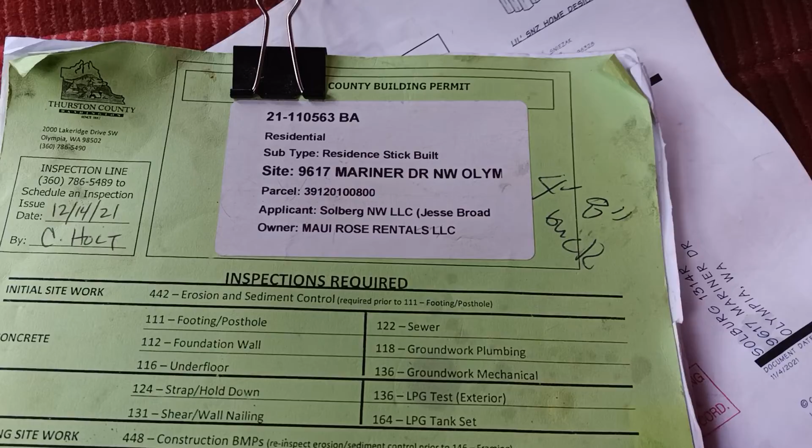This is a correction for a foundation wall inspection for 21-110563.

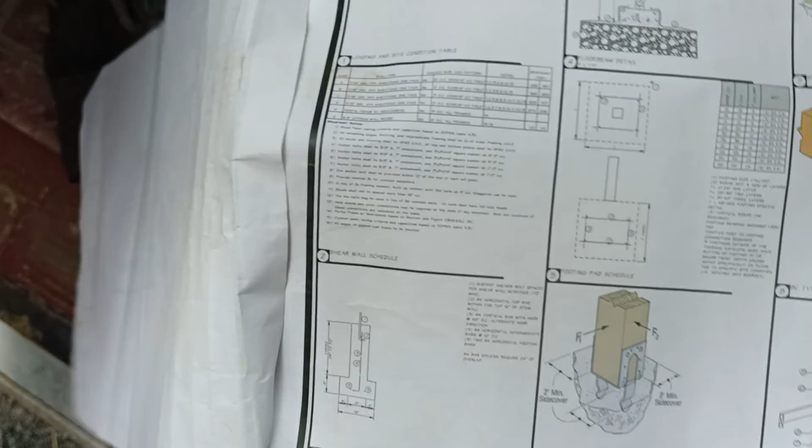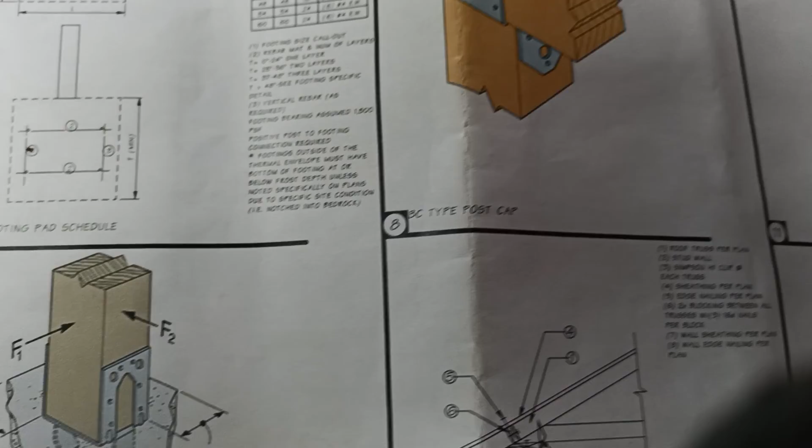Corrections noted on owner stamped approved copy of plan were: firstly, the number 4 call out for an intermediate bar in the 2-foot foundation wall. We weren't sure of the clarity being 12 inches on center, but we did add that second bar to ensure we were correct according to plan.

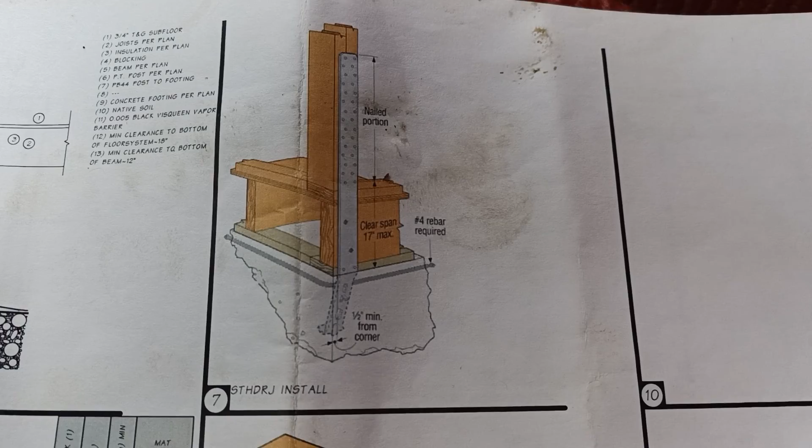Second issue being we want the number 4 rebar to carry in the top portion of the strap. If I'm interpreting what was asked of me correctly, we were able to elevate the steel with the intermediate bar to catch on the bottom portion of the strap as well as the top portion. We'll show that in the physical.

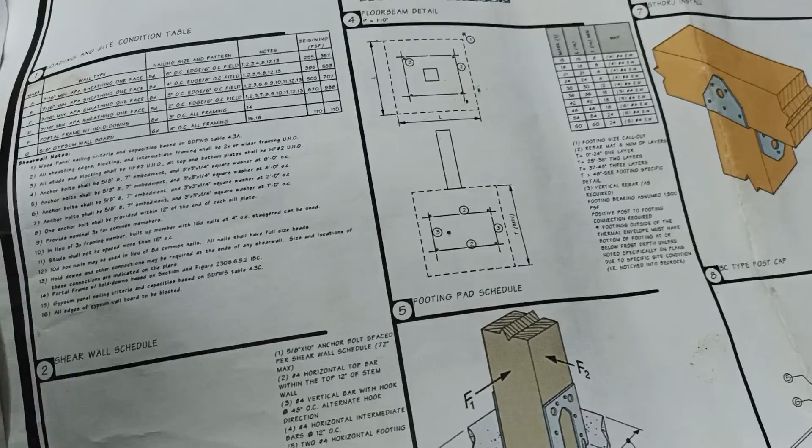Lastly, the pier pads with the 4 bars each way, you wanted to see elevations show proper depth and clearance, so we'll show that as well. We'll head out there now.

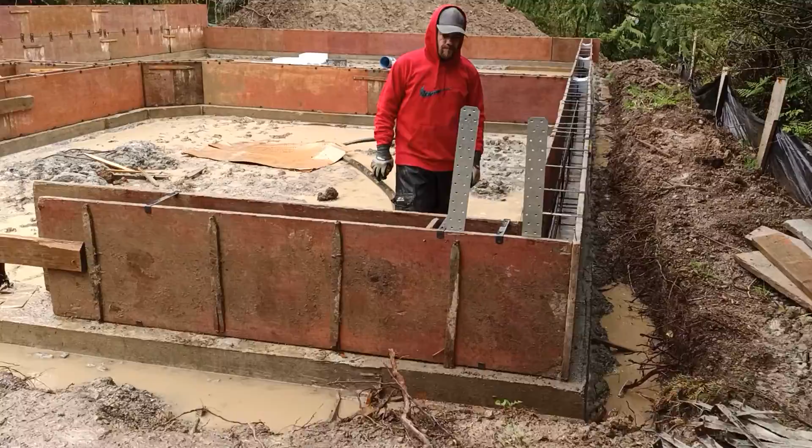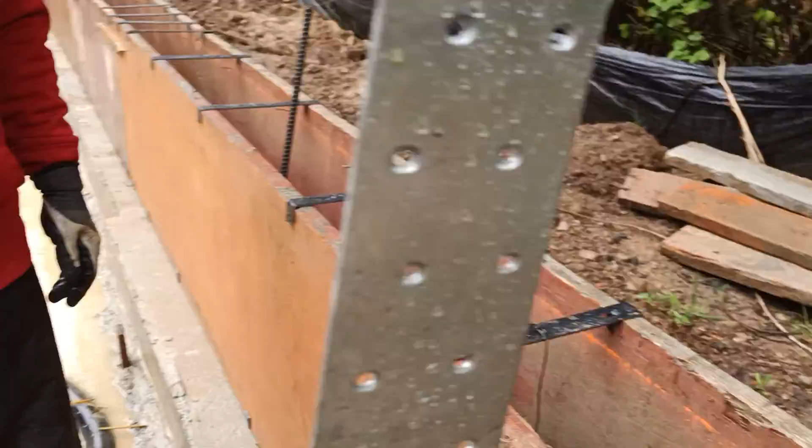And we're looking at front of garage. We'll start with the left side first and show that second bar, intermediate bar catching well within the strap, as well as the left side garage wing shear panel, which is connecting nicely. Hopefully that's what we're shooting for and looking for.

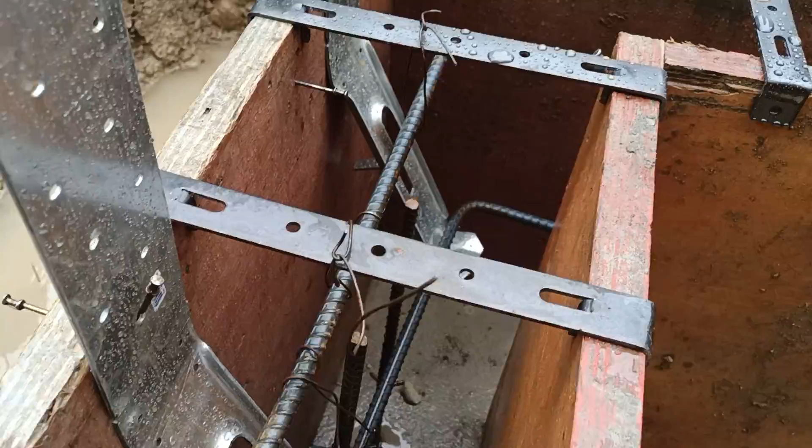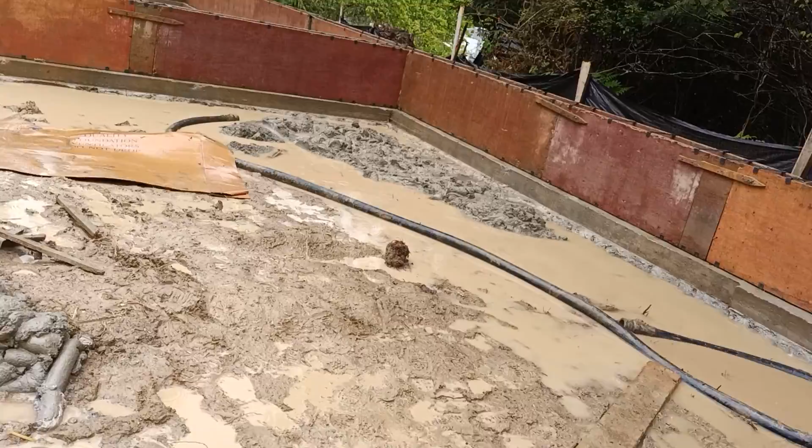Second bar added throughout garage. We will come around to the right side of the house, get the scope of wall.

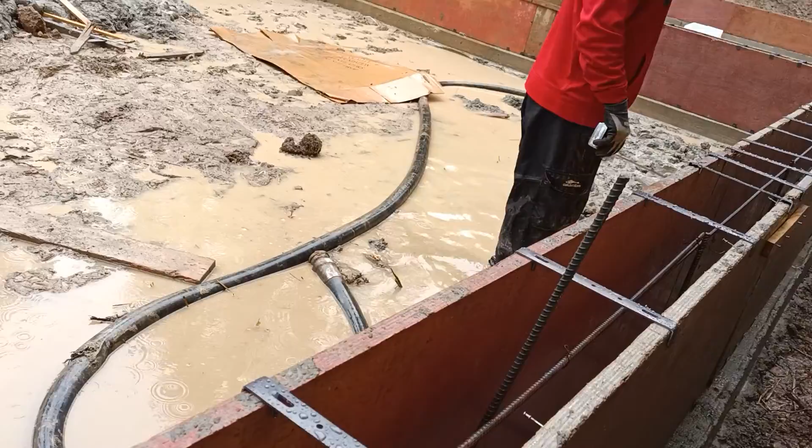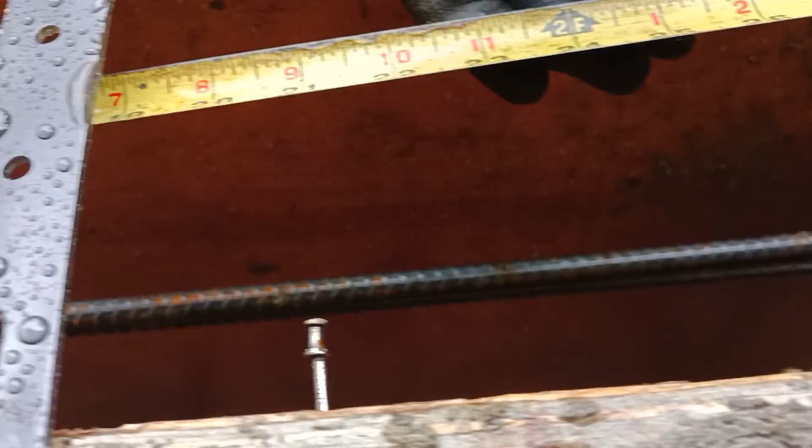We'll show our 2 bars in the wall. 2 foot. Yeah, we have a 2-foot lap spacing there for that top bar. We did just raise the original bar and add the second bar to midpoint.

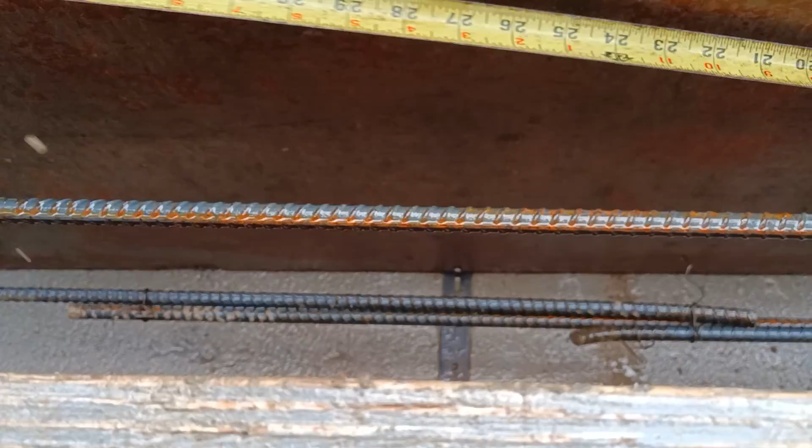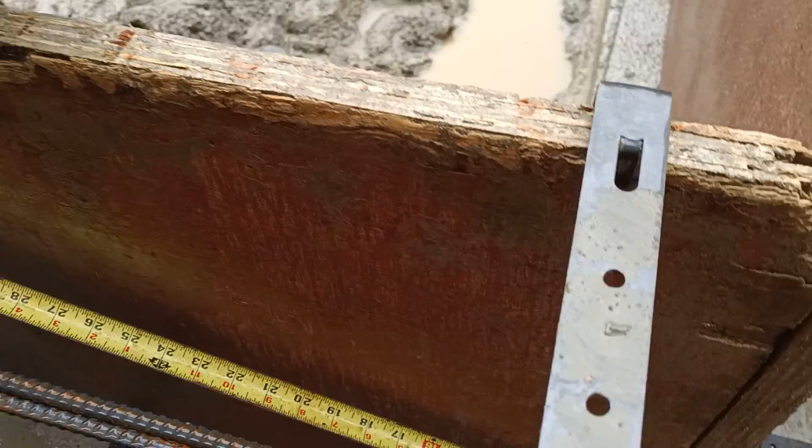Here's a couple more laps to show you on the bottom bar down in the intermediate. That one right there too. There's 2 foot right there. And then we got one right here as well for the intermediate bar. Just showing proper lap spacing.

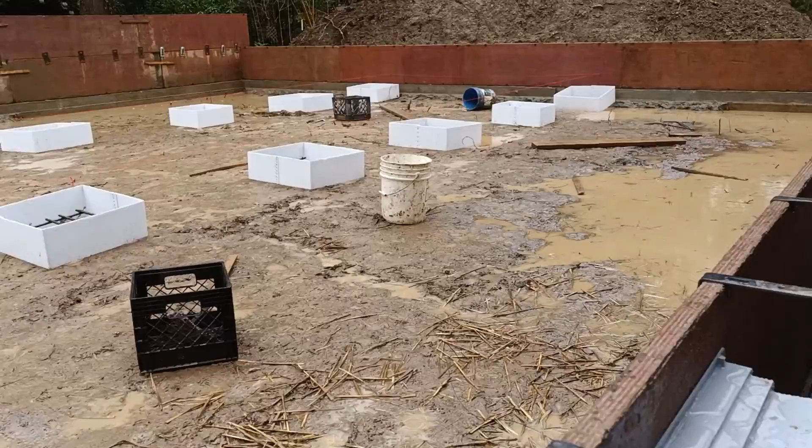We show the second bar in the back of the garage as well. I'll hop on the inside here. More of the same, 2-foot bar.

Let's show the 12-inch clearance on the top bar there. We're still well within the 12 and the 2-foot wall, no problem. 12 inches right there. And then obviously we have some external crawl spacing, so we've got proper clearance and distance away with multiple bars to the buck.

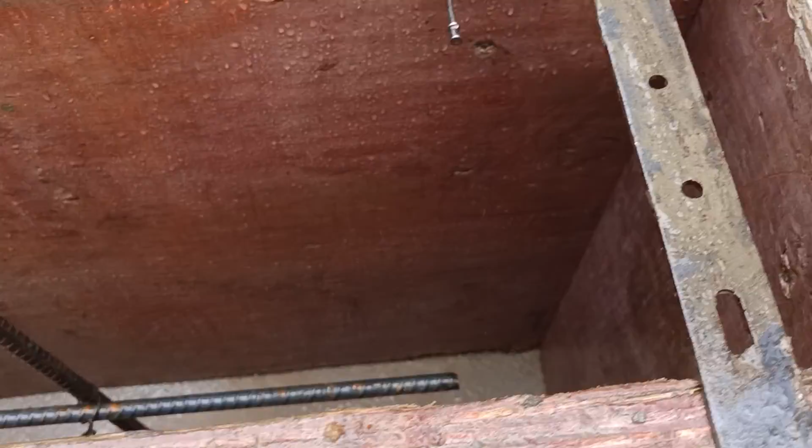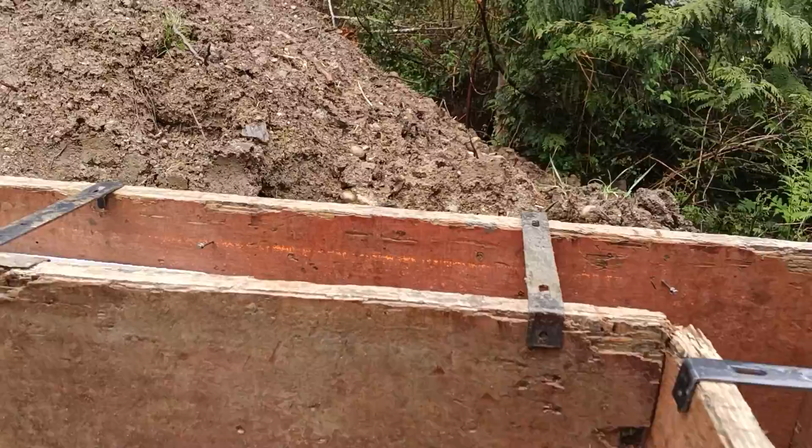And then coming around the corner, more of the same. You got a 2-foot lap there. Heading down that back wall.

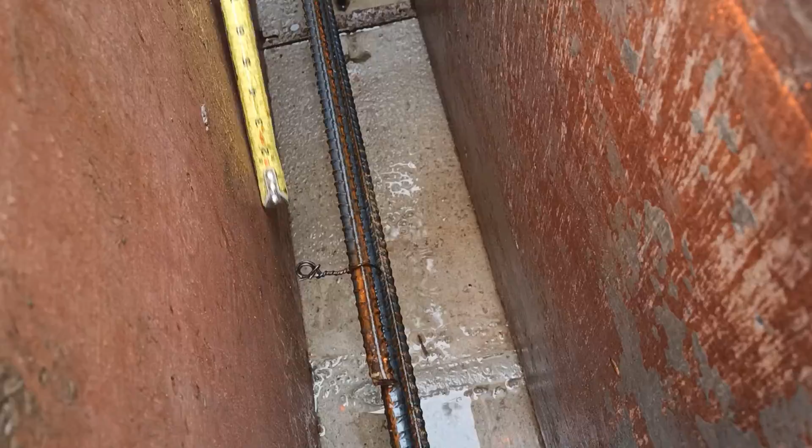We'll show the 2 bars of steel as well. Again, we'll show within 12 inches of grade. Got a lap there. We can show our always sticking to over 2 foot with the inch away on the tie. 2 bars with the proper spacing going into the 4 foot, which was already shown.

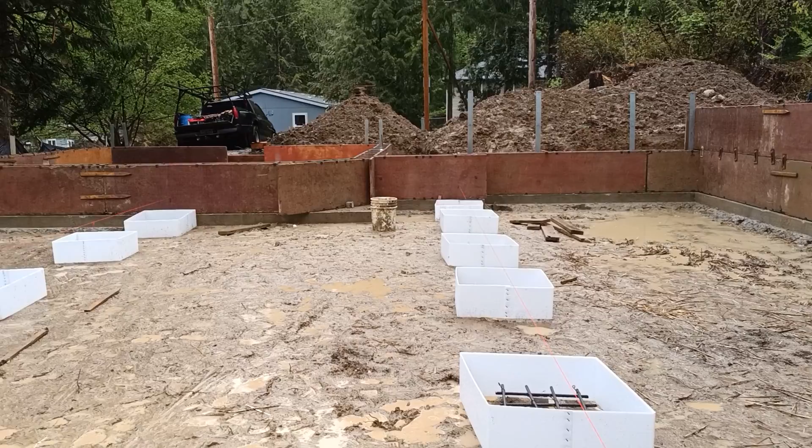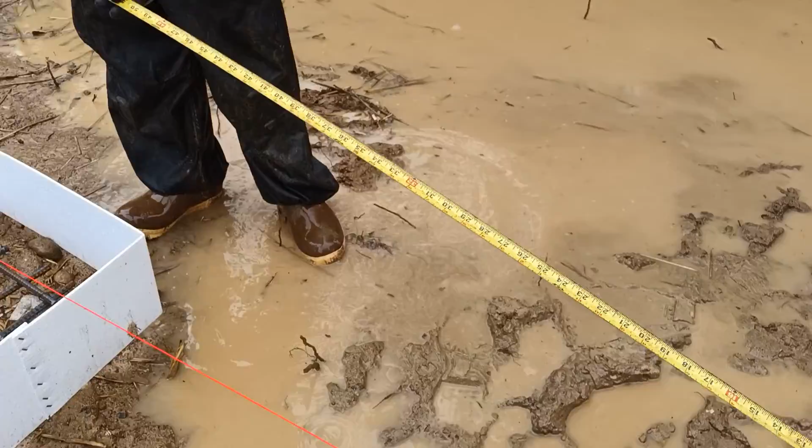Then the next most important and time consuming was elevating the pads with the dobie blocks. We set up strings, we can verify for you. It's 12'2" from outside to outside on both, 6 foot on the spacing. We could start by stepping back for scope, and then you are 6 foot for the spacing.

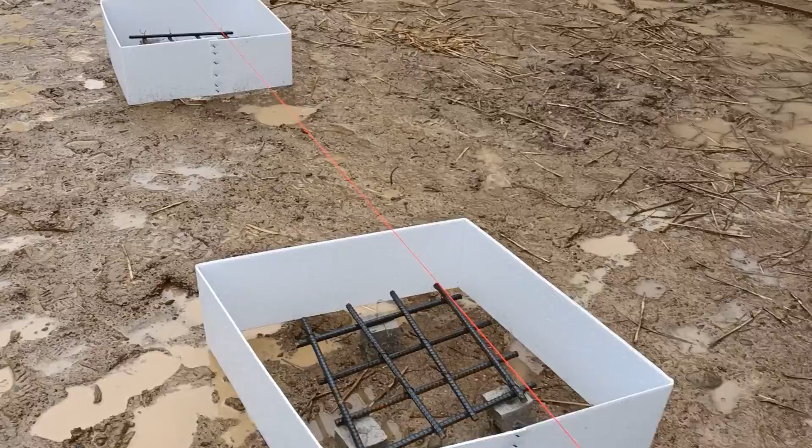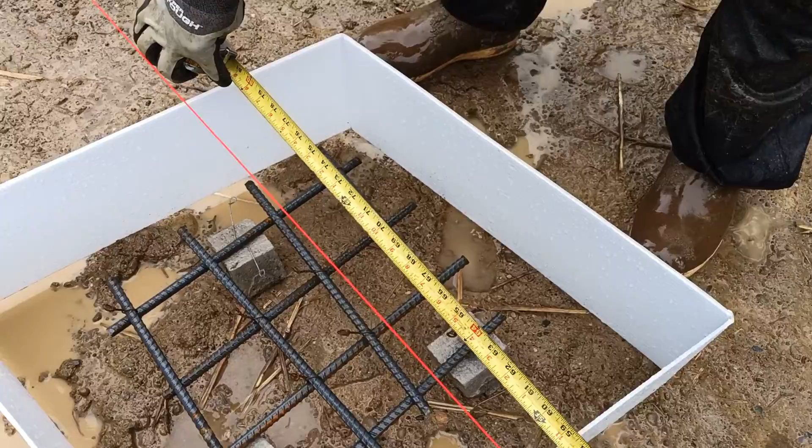We could carry through to the next one just to give you depth and an idea, which can be difficult, but we understand you want to see everything. There's your 6 foot, so on and so forth. We can show you every one if you'd like, but we're looking at the same, 6 foot.

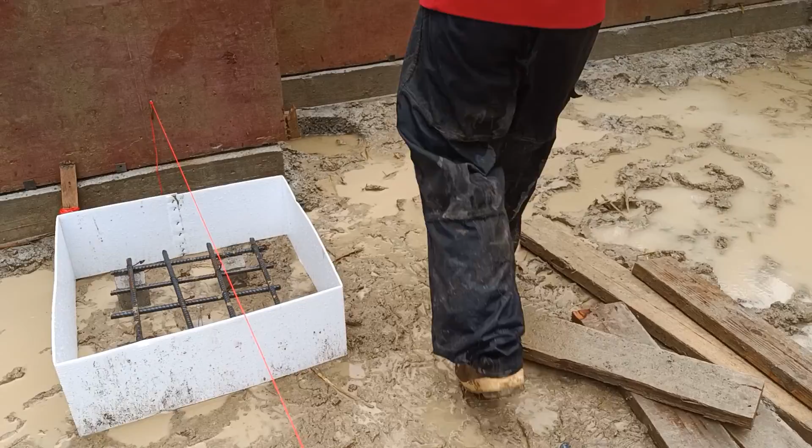6 foot. And then obviously your bar to the end. We'll also see if you can hook on the wall out there. That's fine. And from inside of wall, we'll minus the 8 inches, which will put us at 11'6".

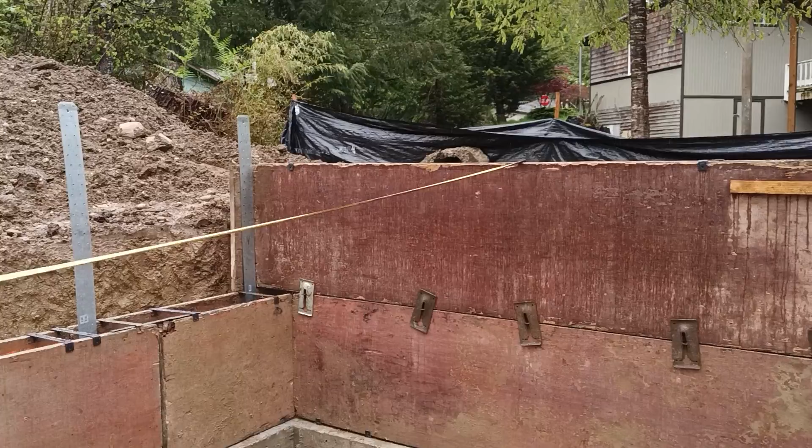You can see we're pulling from the inside, pulled tight. Our strings were set up to 11'6", as you can see there. And that'll show you proper. We are ensuring proper spacing and distance, correct measurements as well.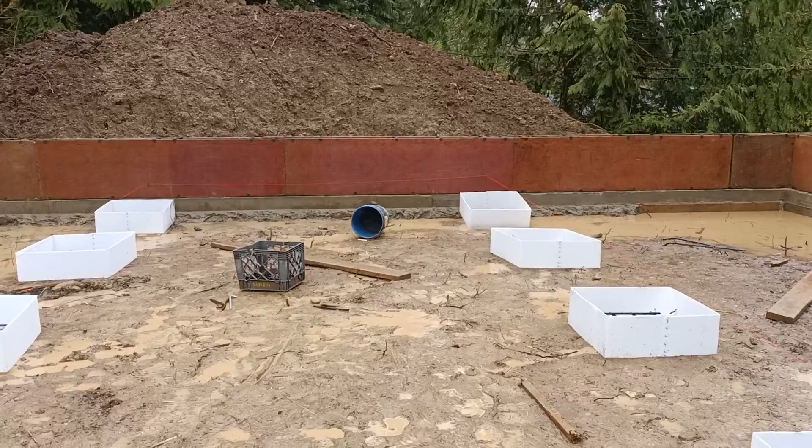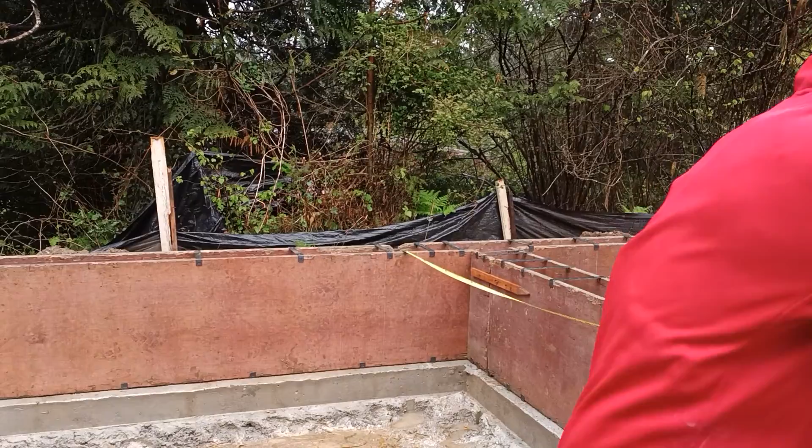We could pull from over there. We'll show you the other side where our string's set up to 11'6" from the inside, which is just easier to pull for us, and which 11'6" would put you at 12'2". Then we can show you spacing down this last row of pier pads.

Yeah, just kind of float it. So we'll show distance, spacing, 6 foot. Distance, spacing, 6 foot. 6 foot.

And the final one being 6 foot as well. We'll grab from the inside to just show that we're pulling even distance. Again, will be 11'6", which is where our strings are set up, and strings will ensure accuracy will be in place at time of pour.

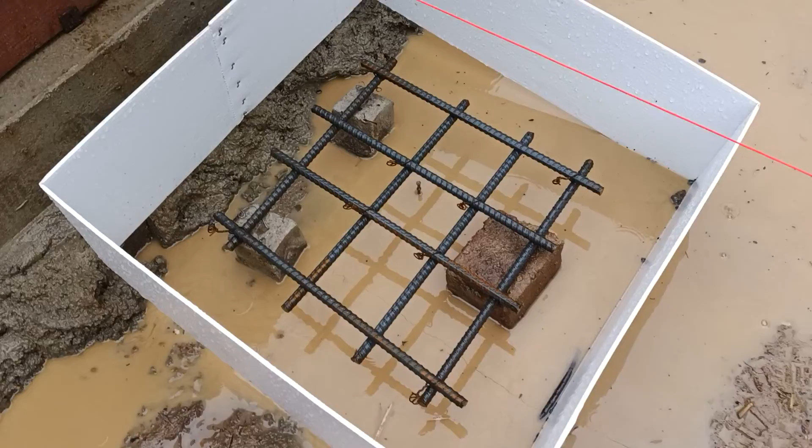Lastly, we could show our distance on spacing and match. You can see here there's a little bit of puddling, but distance is clear and proper. Here's a good one. We'll show our 8-inch depth.

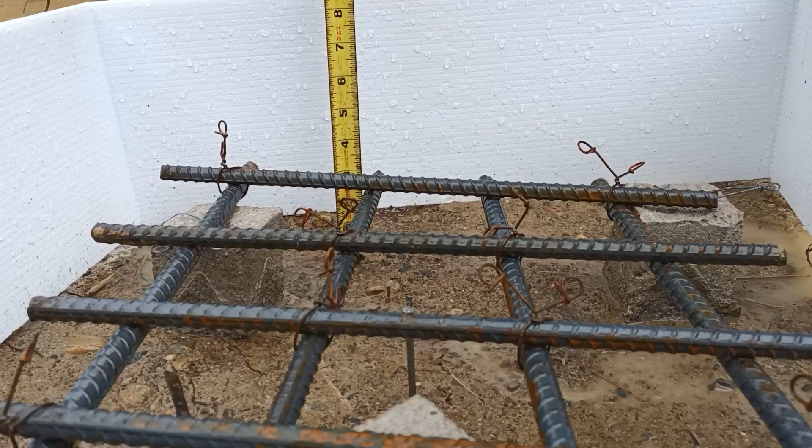We used a 24-inch pier pad. We got our depth, and then you can see our mat of steel is 3 inches of that. And we'll just kind of give you a follow through to each one.

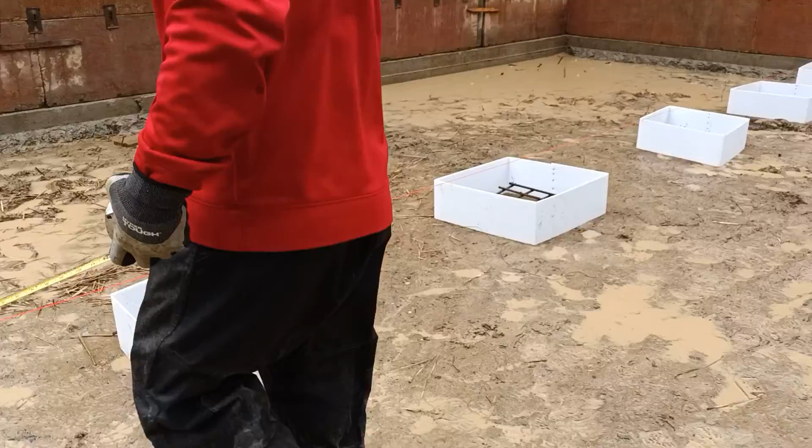Let's step back so you can see where I'm going, and then show you. Step back, kind of show you an idea, and then zoom in. And then lastly, there. Then we can carry around to our last row of pads, show you completed the distance with the dobie blocks, which is a very good idea.

Three inches on an 8-inch pad. 3 inches. 3 inches. Getting the scope. We're running down to the last one.

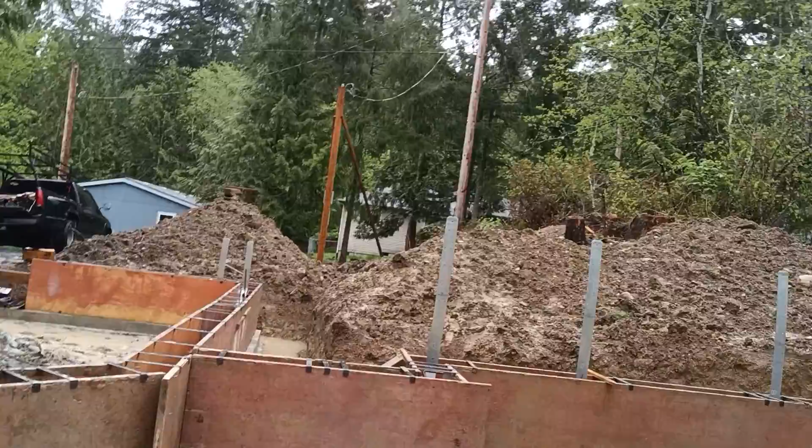3 inches there. And 3 inches there. The only thing we have left, we have to show each of those straps there in the front that we didn't get to show you yet. Same scenario, added the second bar. Carrying through, and then you can see over there the second bar was able to extend tall enough.

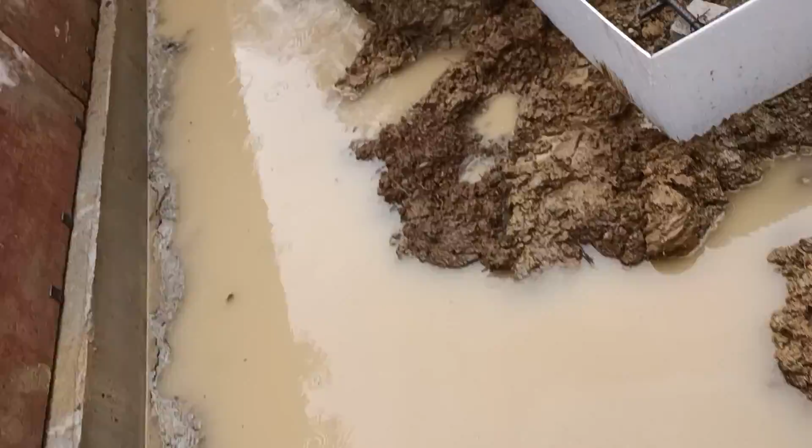Give me a second, let me climb over this thing. Also stepping outside to show pier pad, obviously we're within the good distance. Yeah, you're fine. I won't drag you out in this mud hole.

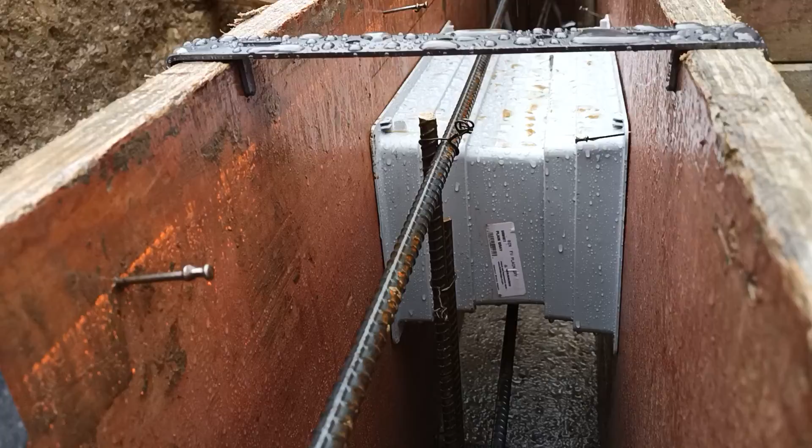Second bar catching steel, covering the top portion of the strap. You kind of see the same thing there. We did go over the vent, and we were able to carry 1.5 inches over, 1.5 inches under for a proper spacing. There's a good show of distance and spacing.

Forgive me, I'm crawling through the mud. Second bar of steel installed and catching strap, and same with there in the last corner.

Hope that covers everything needed for corrections. Thank you.